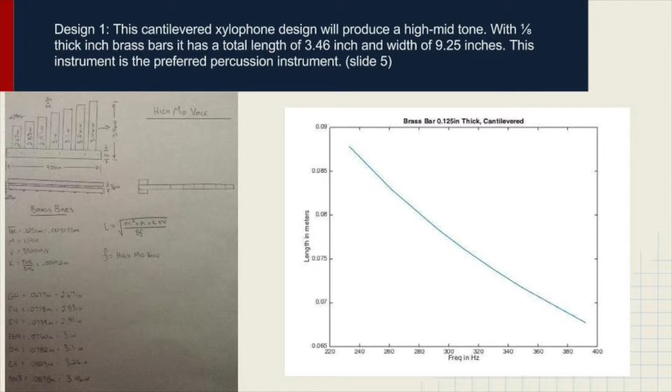Thanks, John. Hi, I'm Jared Sliter. I'm going to be covering the percussion instruments. My first design is a cantilevered xylophone system that uses 1/8 inch brass bars with a total length of 3.46 inches and width of 9.25 inches, covering a high-mid tone range.

My second design is a simply supported xylophone system that also uses 1/8 inch brass bars but has a length of 9.25 inches and width of just over 8, covering a high tone range.

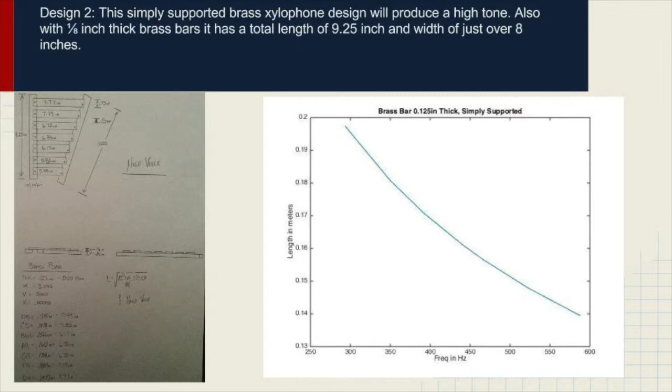My third design is a simply supported xylophone system again, but it uses 1/4 inch oak wood with a total length of 12.5 inches and width of just over 15, covering a mid-low tone range.

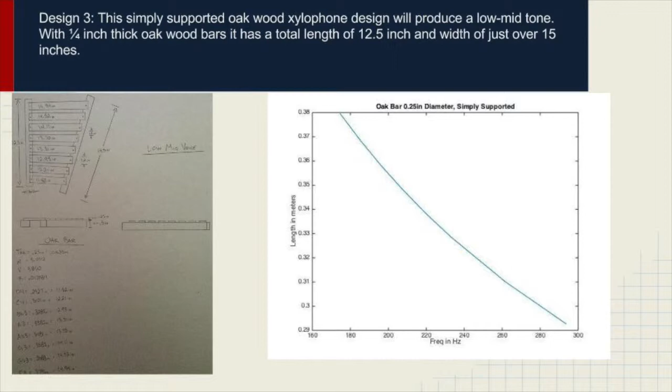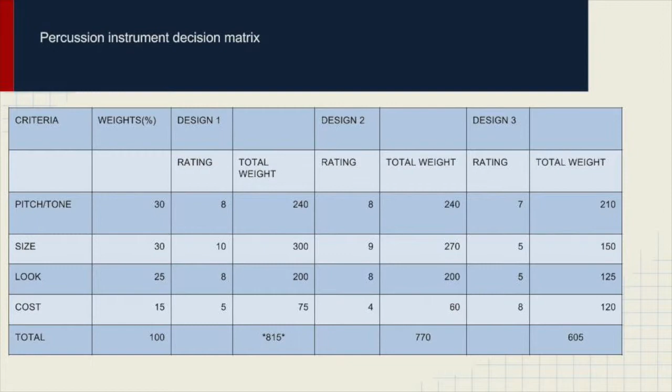As you can see from my decision matrix, design 1 covers the requirements and criteria best, so it is my preferred design. Now I'm going to send it over to Zach.

Thank you, Jared. My name is Zach, and the instrument I came up with is a 2-string dynamic range instrument. It uses a bow to vibrate the strings like a violin would. To change frequency, the user adjusts the tension of a plate on the underside of the instrument: squeezing the plate increases tension and raises frequency, releasing it decreases tension and lowers frequency.

The hole in the center of the design allows for amplification of the sound, and the instrument is equipped with an arm strap, since it would be difficult to grasp the instrument while adjusting the tension plate. The available frequency range for this instrument varies from 0 to 716.252 Hz, which is plenty to cover the alma mater.

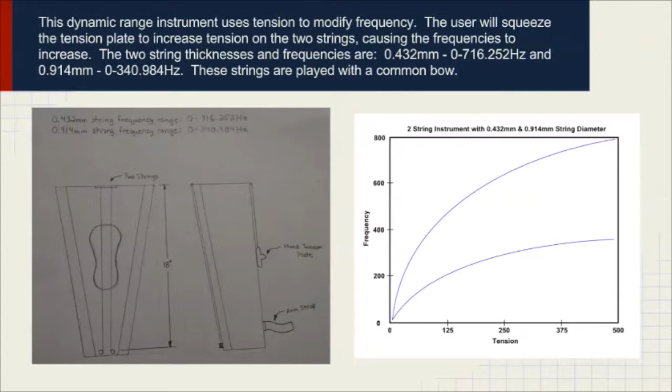Thanks, Zach. Great ideas. Jared, awesome percussion instruments. My name is John Campbell, and these are my instrument suggestions for the string instrument to cover the low range.

Let's look at my first instrument. It is a low string instrument and my preferred submission for this project. It features a simple string construction of only 0.047 inches in diameter — actually 18 gauge electrical wire.

There's a crank at the top of this design that allows for adjustment of string tension, and this design also includes a clamp that can navigate up and down the shaft of the instrument so you can adjust the string length as desired to achieve good frequency coverage. This instrument will again cover the low range.

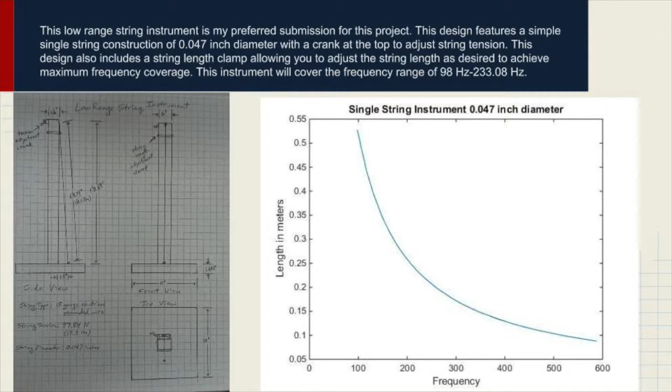My next instrument is more of a box style, kind of similar to a guitar but a little more Renaissance, let's say. It's basically a box with an opening and strings stretched across it. Screws at the top of each string adjust the string tension so they can resonate at the appropriate frequency over the open cavity of the box. This instrument will again cover the low range of the alma mater.

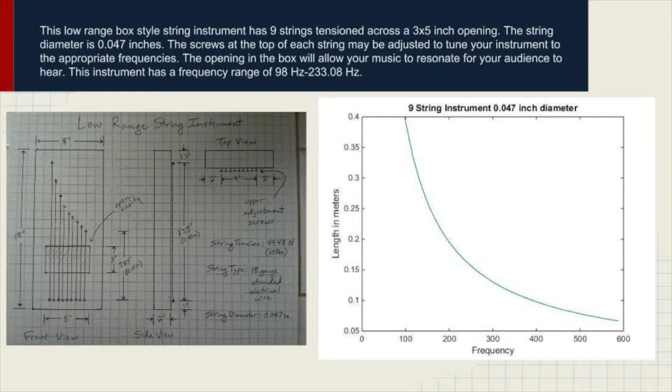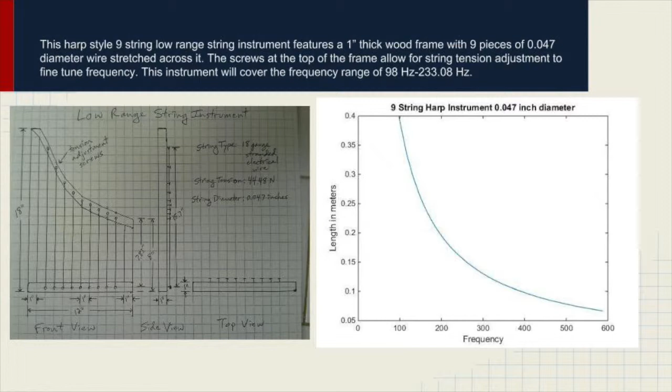My third instrument submission is more of a harp style instrument. It has 9 strings stretched across a harp style frame with a custom design at the top to accommodate each individual string length. Again, each string has a screw adjustment to adjust tension, and these strings are also just 0.047 inches in diameter. They will cover the low range of the alma mater.

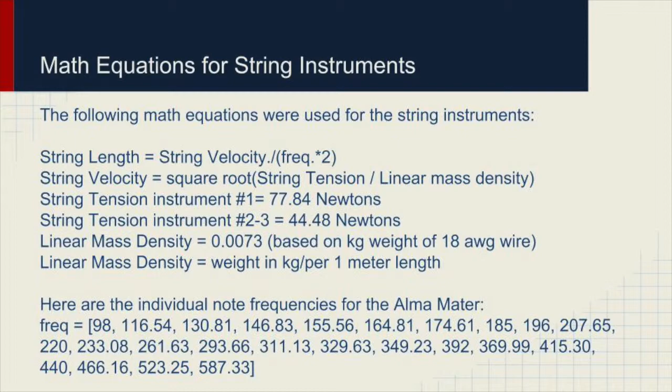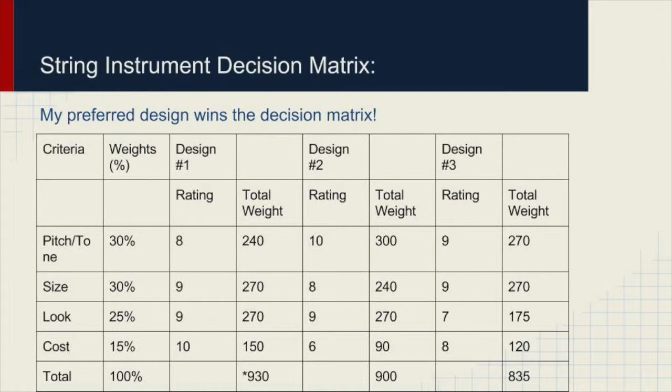Finally, you can see my string instrument decision matrix. As you can see, my first design, which was my preferred submission, has won the decision matrix and become my preferred suggestion for this project. That's my submissions for the string instrument for our alma mater for Team 7.

I'd like to pass it over to Ryland. What do you got, Ryland? Good stuff, John. Finally, my name is Ryland Doerr, and I'll be covering the wind instrument.

There are two primary types of wind instruments, open and closed cylinders, and I have two designs for each. My first design is an open cylinder with holes cut into the length of the instrument at specific intervals to produce the necessary notes to play the ASU alma mater's high part.

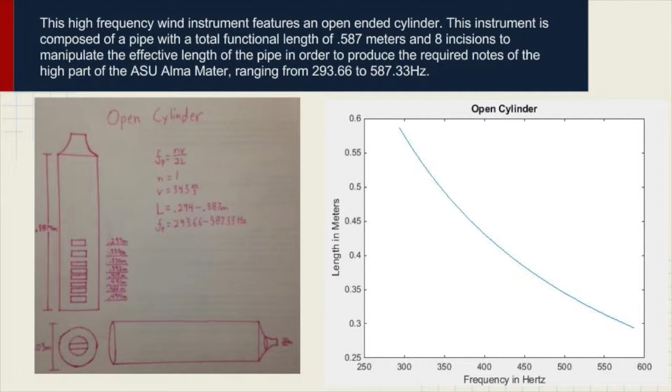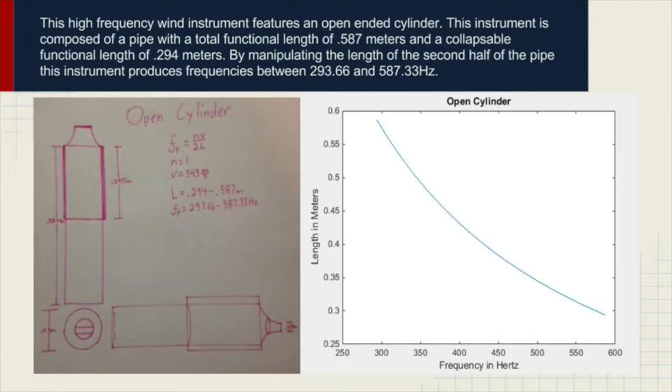My second design is also an open cylinder, but this one features a slide, enabling the musician to hit any note between 293.66 Hz all the way up to 587.33 Hz.

Next, I have a closed cylinder that also features a slide and would produce the same range. However, for a closed cylinder, the length would only need to range between 147 and 294 millimeters, whereas for an open cylinder that same range would need to be between 294 and 587 millimeters.

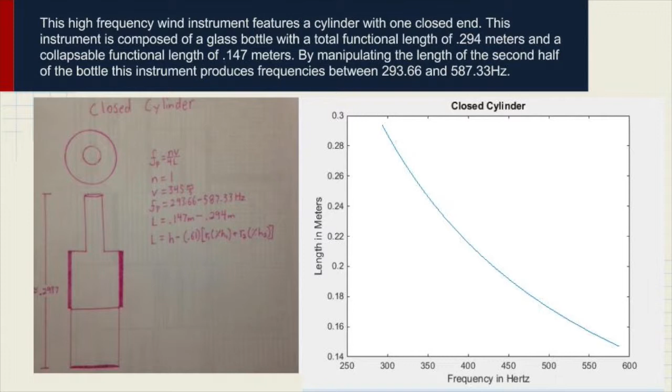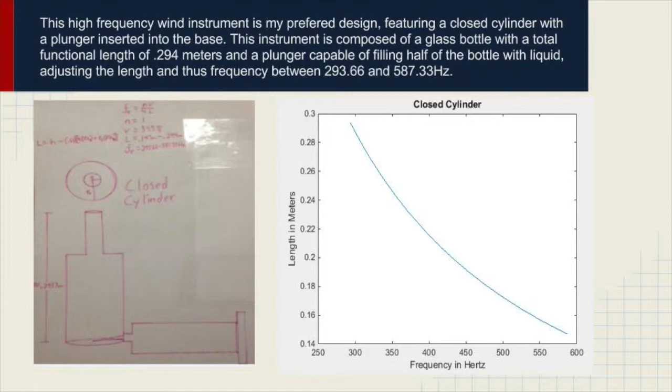Now, my preferred design is a closed cylinder with a plunger feature that allows the musician to pump liquid in and out of the instrument, varying the length of the total instrument and thus the frequency. The musician would be able to hit the entire range and predetermine on the plunger where to stop pulling to know what note is being produced.

In this presentation, we have presented designs for percussion, string, and wind instruments, and indicated which instruments we intend to pursue for this project, which will include 2 percussion, 1 string, and 1 wind instrument. We are of course open to any suggestions, and thank you for your time.